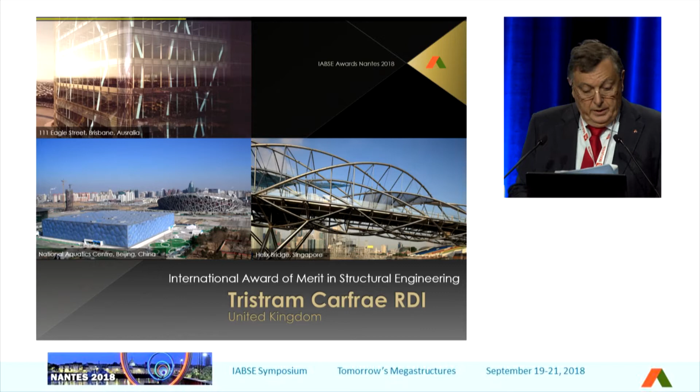Tristram Carfrae. May I please call him? It is my pleasure to present the International Award of Merit in Structural Engineering to Tristram Carfrae from UK in recognition of his outstanding contributions for more than 50 years to structural engineering, including several span world records and outstanding structures, and his sensitivity to bring structural engineering design close to art and poetry.

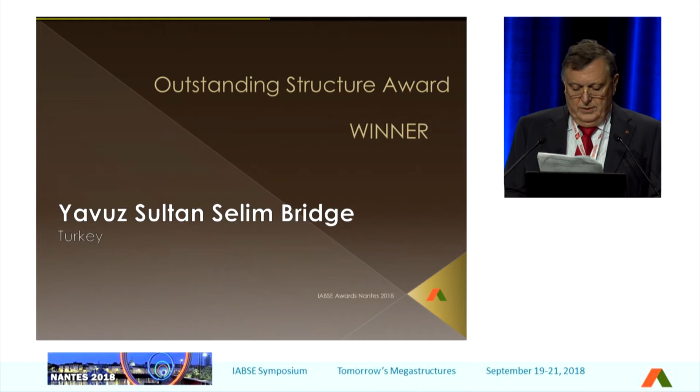This year, we have the Yavuz Sultan Selim Bridge, the third Bosphorus Bridge in Istanbul. It's considered the future of transportation and commerce for Turkey, linking Europe and Asia, by its major importance and its symbolic situation between the two continents. The bridge has become an iconic structure and a landmark of the Istanbul region and Turkey.

May I ask Naeem Hussain, please? He is the chair of the award commission. And the awardees, may I invite now Mr. Samet Sain, Mr. Thierry Delemont, Mr. Vincent Deville, Mr. Michel Virlogeux.

The laudation of this structure: the Yavuz Sultan Selim Bridge exemplifies an outstanding concept of combining the advantages of suspension and cable-stayed systems, as well as design and construction with the most advanced technologies in structural engineering. It epitomizes a holistic approach of engineering and architecture.

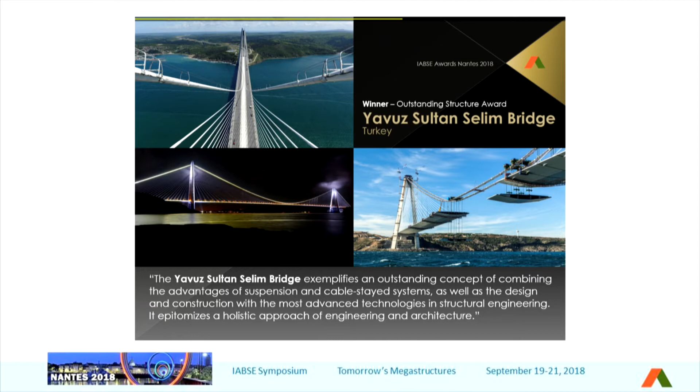Within this award, we also refer to the three finalists. The first one is the viaduct over the River Almonte in Cáceres, Spain. It's part of the high-speed railway between Madrid and Extremadura, crossing the River Almonte through a 996 meters long viaduct with a great 384 meter concrete arch, which makes it the largest HSR arch bridge built to date.

May I call Mr. Pablo Jimenez, Mr. Guillermo Capellan, Mr. David Arribas, and Mr. Pedro Cavero de Pablo.

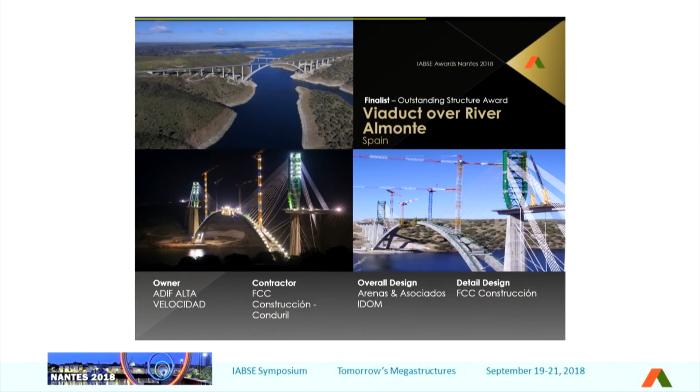The other two finalists are the Queensferry Bridge in UK and the Circle Bridge in Denmark. Unfortunately, we do not have the representatives here, so we shall just give congratulations to them, and we give the awards to the chair.

I'm taking this on behalf of the Queensferry Crossing people. I just happen to have a little bit of interest in it, and I will give it to the audience. Thank you.

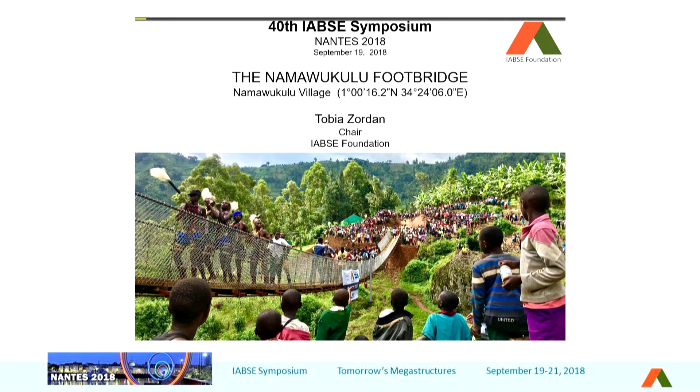Good morning, ladies and gentlemen. Thank you, Bruno. Thank you to the organizing committee and to IABSE for giving the foundation this space. I'm very pleased to be here today on behalf of the foundation and to have the chance to present to you our latest achievement.

It's a bridge. It's a bridge in Uganda. It has quite an interesting story, and I hope you will enjoy the story, and you'll be able to share more challenges in the future with us.

A few words about the foundation. The Foundation is a totally independent and non-profit institution which is run on a fully voluntary basis. We receive funds and we give out funds, so as much as we receive, as much we are able to provide. The goal is spreading the knowledge of civil engineering and promoting education programs and self-constructions in the most disadvantaged areas of Earth. The challenge last year was to build a footbridge in Uganda, a footbridge with a very high symbolic value and meaning.

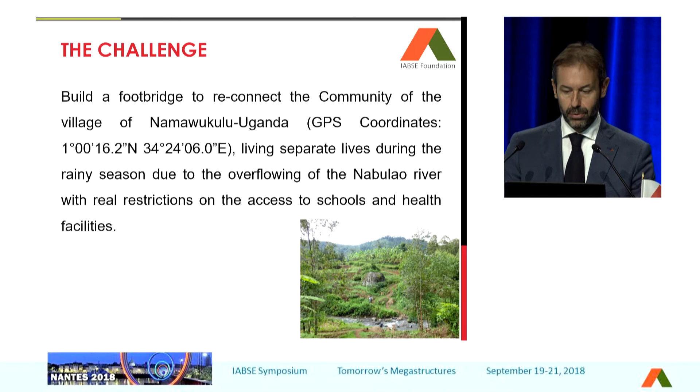A bridge can reunite two separate parts of a village which is cut by a river, flooded during many, many days of the year, more than 4 months. Of course, that creates problems for locals, and we will see what kind of problems in a while.

The partners of this venture: the project was proposed by Bridges to Prosperity, and we took the advantage. It was a very interesting project. IABSE is all about bridges, so we thought it was a fantastic occasion to have the chance to build a bridge.

So we took this challenge. We decided we wanted to be partner in this venture, and we shared the price with Ramboll, the other partner that paid for 50% of the cost. But we are IABSE - we want to be not just a financial partner. We are bridge engineers, we wanted to be a technical partner. And more than the money, we wanted to put effort, knowledge, strength, passion, and our sweat.

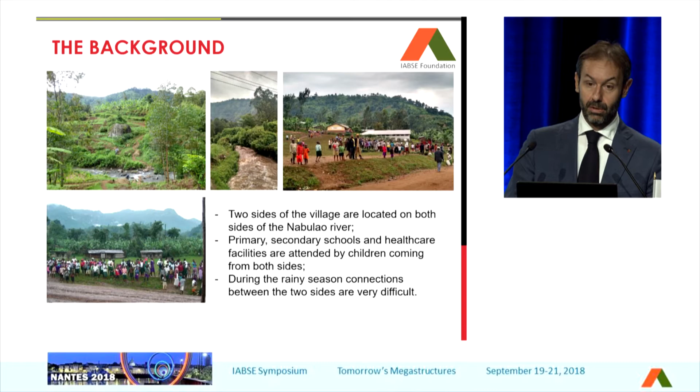The background - what we found was a village that was separated in 2 parts. A lot of children and locals were not allowed access to healthcare facilities and schools for a big part of the year, especially during the rainy seasons. You see here some short movies, a lot of enthusiastic boys, a lot of expectations to see what we could do, and if finally they could get a bridge that could improve the economy and the social relationship of the local community.

The project was provided by Bridges to Prosperity. This is quite a standard project. Of course, we are engineers, so the project has been double-checked, and we thought it was very simple, very cheap, but also a reliable one. And we decided we wanted to go for it.

The most important part, the team of volunteers. These guys are engineers, and they decided to go on site and put everything they had in order to get to the final results. Young people, a lot of energy, a lot of enthusiasm under the flag of IABSE.

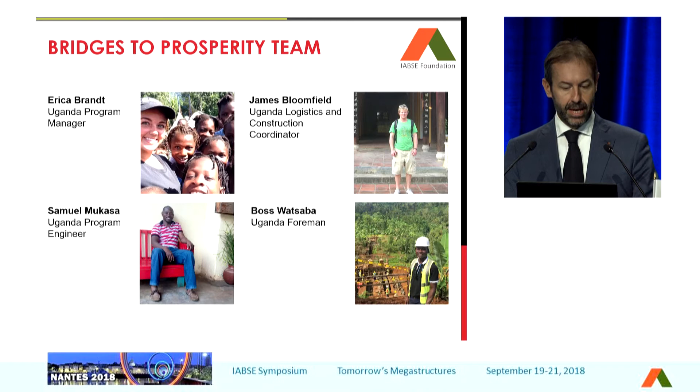Very good organization on site provided by Bridges to Prosperity. You can see here some of the people involved - the general manager, manager for logistics, and then a site engineer, a local site engineer, and a local foreman to check everything was going on there.

The local community played a fantastic and key role in the construction of the bridge. They showed very high motivation. They were trained before the beginning of the construction. They got a period of training, and on Saturdays, the worksite was fully open for the local community to come and enjoy, and of course contribute.

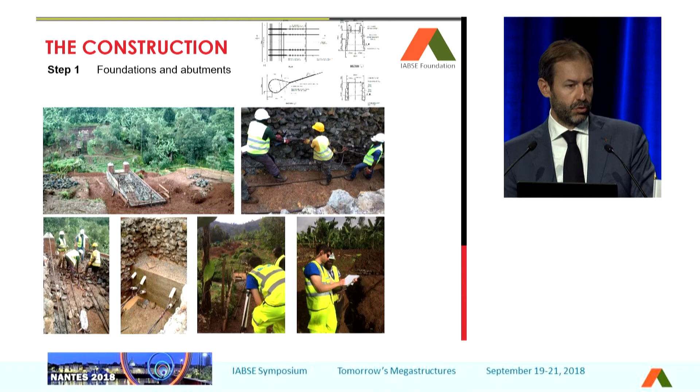Then the IABSE team arrived, and with the local team and Bridges to Prosperity and the Rumble team completed the foundations and the abutments. Really our engineers worked as carpenters to prepare all the details, to lay the cables, to bend the bars, to prepare the fences. And I have to say I'm very proud of it.

We started from the beginning, and roughly in 1 month, we got to the completion of the bridge. You see here some phases. I have to say that I'm very thankful to the team that worked on that.

And we finally got the opening of the bridge with the dynamic test of the structure. Very risky, actually, because we made some measurements about the frequencies, and we were very concerned when we saw people jumping, dancing on the bridge.

You see here this guy, Serjan. I think what better than having a few words from a person that put his effort and his sweat on site. So, Serjan, I think everybody is happy to see your face. IABSE is made of people, of volunteers, so maybe just a few words - you can explain your experience and what you got insight after this venture.

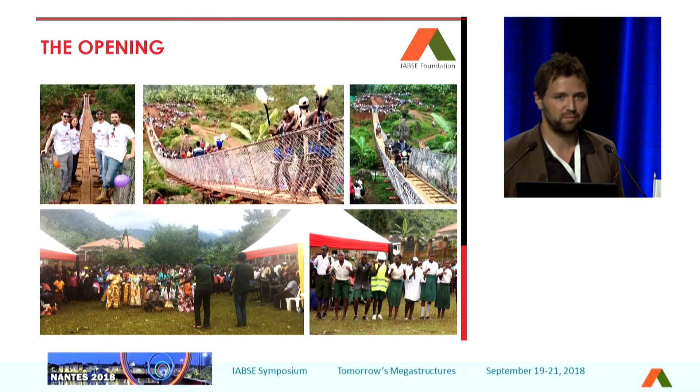Okay, Serjan, thank you for your words. I think they've been very important to all of us. You mentioned a very important thing. I hope you will continue doing this. Of course we will. We have plans for next year.

This is, I guess from my knowledge, the first bridge built under the IABSE flags. So this is our bridge, this is your bridge, this is the bridge of all the members of these associations and of all the volunteers. We want to continue this. We have plans for next year. We would like to meet you again in September with another achievement. But of course,

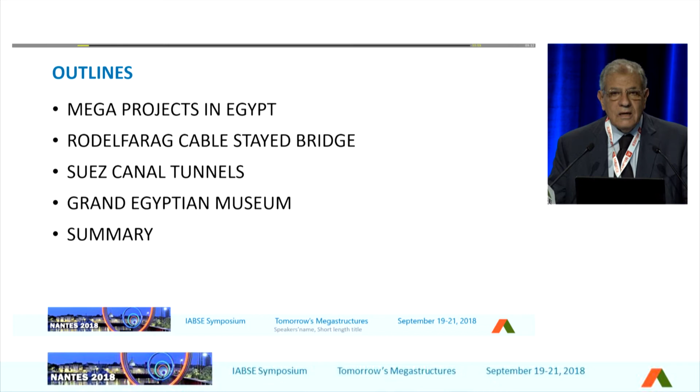Mega projects in Egypt - I am going to concentrate on highlighting three projects. One is a cable-stayed bridge, the other is two tunnels under the Suez Canal, and a landmark project - the Grand Egyptian Museum.

The revolution in January 2011 took its toll on the Egyptian economy, resulting in a slowdown that was reflected in deterioration of the real GDP growth rate and the increase of unemployment. Furthermore, total investment witnessed a material downward trend, and the country's foreign reserves were depleted significantly. This shows how unemployment increased after the revolution and the collapse of the Egyptian economy. Consequently, the rating agencies downgraded Egypt's sovereign rating by around 6 notches during the period from January 2011 to July 2013. You can see how also this downgrade occurred.

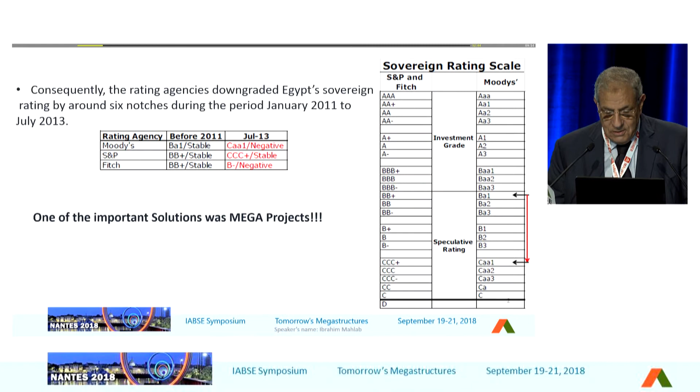We found that the only way to energize and activate our economy is going for mega projects. During the last 4 years, mega projects in Egypt have been diversified. We started with a very big project, the doubling of the Suez Canal. We dug a new canal parallel to the existing canal, with millions of cubic meters of dredging. During this period, we used 22 dredgers, and we achieved this project in 1 year.

The second one is electrical power station plants. We added 25,000 megawatts to our grid in 4 years, and I think this is the biggest project in the field of electrical generation. Affordable houses - 1 million units are planned to be added; we achieved 650,000 units till now. New roadways - 7,000 kilometers were added to our network in 4 years, and this also I think is a very remarkable project in Egypt.

Reclamation of the desert - we are adding 1 million acres to be reclaimed in the desert. New cities - 14 new cities spread all over Egypt, and a new administrative capital is now under construction. That means Egypt is now a very big site, working 24 hours, 7 days a week. Fisheries - we established a big fishery, 3,000 acres in the north of Egypt.

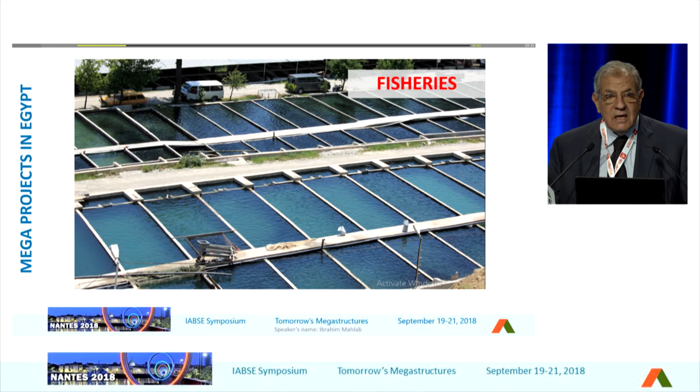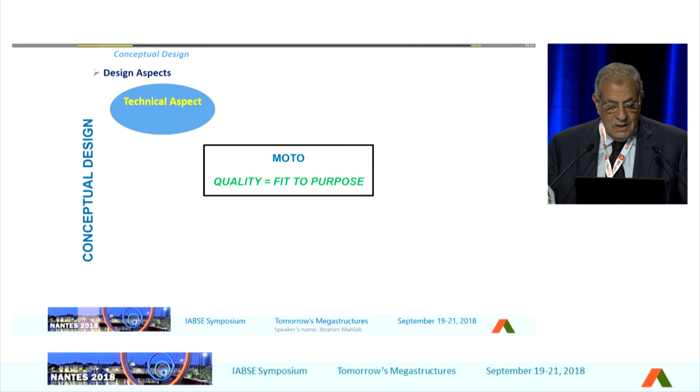Restoration of heritage and monuments - Egypt is full of heritage and monuments, and now we have started to restore them. Mega projects in Egypt: the Rod El Farag cable-stayed bridge is a remarkable bridge which we can really present, along with the two other tunnels under the Suez Canal, and the Grand Egyptian Museum. Our motto is quality equal to fit for purpose, and this was the concept of our thinking - technical aspects, economical aspects, formal aspect, and environmental.

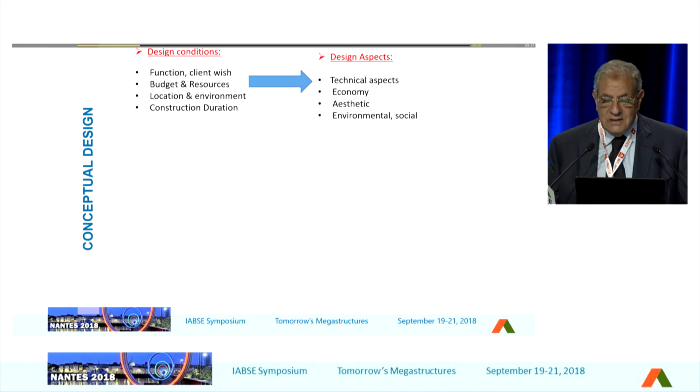Those are the 4 factors we worked with, because we don't have much time, and it is a question of how to select, during this process, the most optimized and most economical project, and to start immediate construction. Design conditions, functions, client wishes, budget, resources, location, and construction give us the design aspects. Design alternatives - we always have to think about value engineering and choose the most optimized project.

There was always a committee from the object design team, architect, client, contractor, project and management. This was a permanent team working to select the most economical project. It gave us the evaluation of alternatives and the decision making, and decisions were taken in a very short time. This was the big challenge.

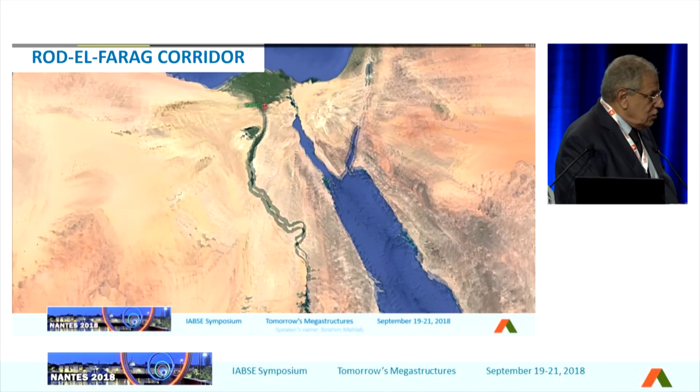Rod-El-Farag corridor is a corridor with 2 stages. First stage... now we have to go to Egypt. Okay, sorry.

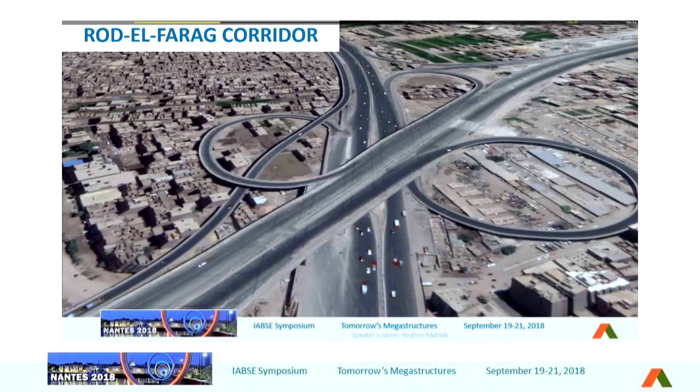This corridor is two stages. The first stage is 29 kilometers of roads linking the west and the east of Cairo. The first stage was an elevated road, 29 kilometers of roads elevated, with 9 small viaducts and 12 underpass and tunnels.

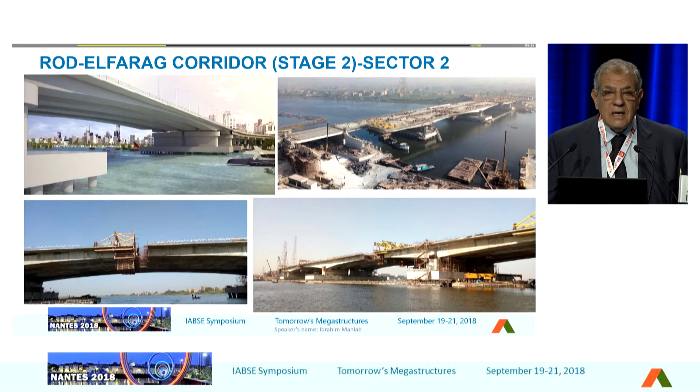This was sector 1. Sector 2 is 5 bridges. Stage 2 is 5 sectors. The first one is a bridge with precast beams. The second is a cantilever carriage pre-stressed bridge crossing the Nile. The third one is also a viaduct crossing an island. The fourth one is a viaduct crossing a very congested area in Egypt, Shubra.

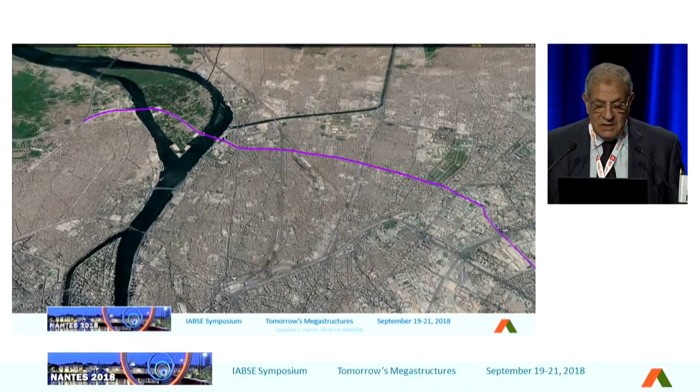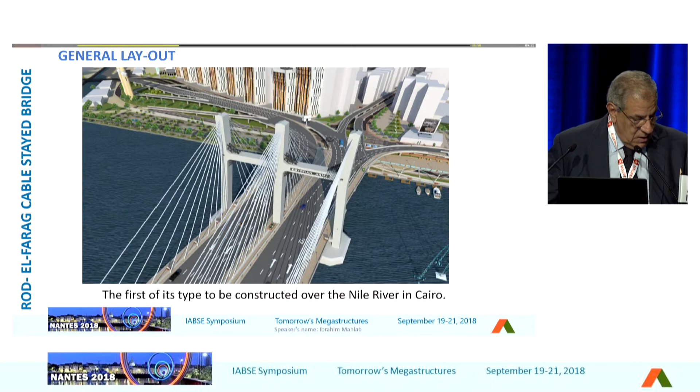The cable-stayed bridge is sector 4. This cable-stayed bridge is very special because it is the first cable-stayed bridge crossing the Nile. The bridge has a semi-floating bearing system in the longitudinal and transverse direction. The bridge floats in the longitudinal direction, where wind and seismic loads are carried by cables and towers, while it is supported transversely by bearings to carry transverse loads due to seismic and wind. The side spans have concrete box sections to work as a counterweight to the main spans under live loads, although this arrangement is unusual for such a side span to main span ratio of 0.4.

In construction, due to the bridge's heavy cross section, it was constructed using a rigid temporary formwork, specially designed and constructed for supporting those heavy loads. The bridge may be one of the widest bridges in the world, because the width varies from 64 up to 88 meters.

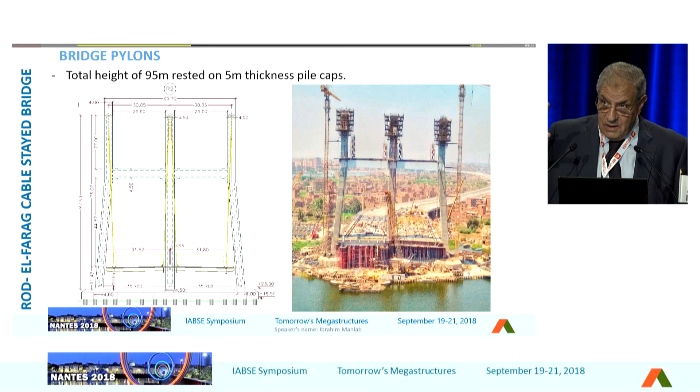This is the height of the bridge pylons. It was constructed by climbing form, with every segment 4.5 meters. The 95-meter height pylons have a hollow concrete cross section. The construction of pylons was carried out using self-climbing formwork. Each pylon leg was divided into 20 casting segments with a height of 4.5 meters each, with 6 platforms, considered among the heights of this construction type. The figures show respectively the pylon cross-section segment and the adopted self-climbing formwork.

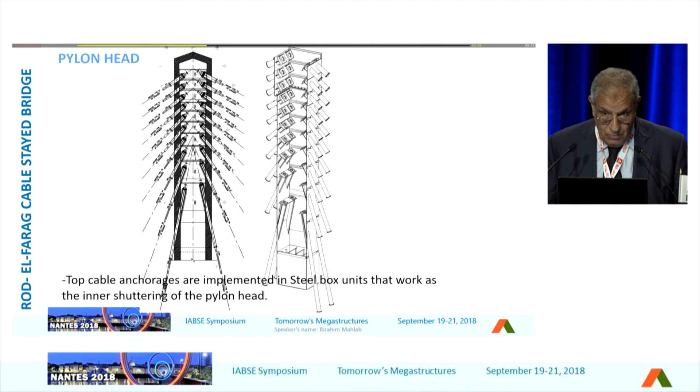This is the pylon head, a steel pylon head. The top cable anchorages are implemented in steel boxes that work as the inner shuttering of the pylon head. This was fabricated outside in a workshop, and because of the angle and accuracy required, the tolerance is almost zero.

This is the pre-assembly of units for geometry control. The pylon head erection: after assembling it in the pre-assembly workshop, we transfer it to the site and start the erection.

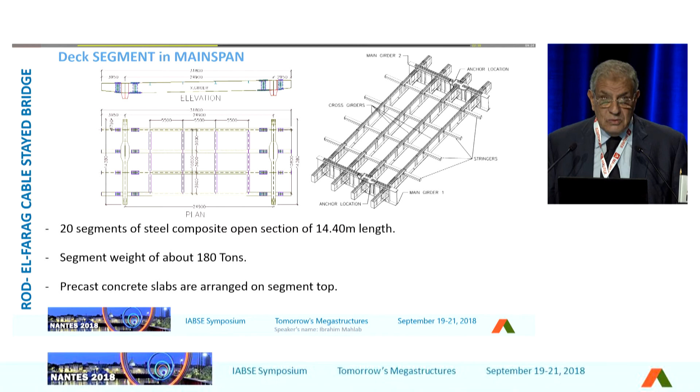The deck segments in the main span consist of 20 segments of steel composite open section, 14 meters in length. Each segment's height was about, and each segment weighed about 180 tons. Precast concrete slabs are arranged on top of the segment, also pre-assembled in the workshop, then transferred by barge and lifted to the site.

The steel deck anchorage. Deck anchorage fabrication considers sag angles, cables and the final geometry of the deck, with all welds fully tested using ultrasonic.

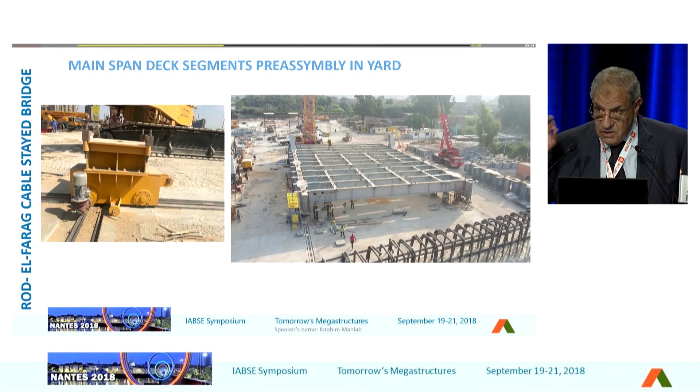The main span deck segment is pre-assembled in the yard. We assemble 3 segments, and all the holes are fitted at the workshop. This is how we assemble the deck segment in the yard.

The cross beams are then moved, and the next segment comes. This is the second segment - this is very accurate, how the holes fit, because when assembling on site it must be 100% accurate. And the third segment is coming.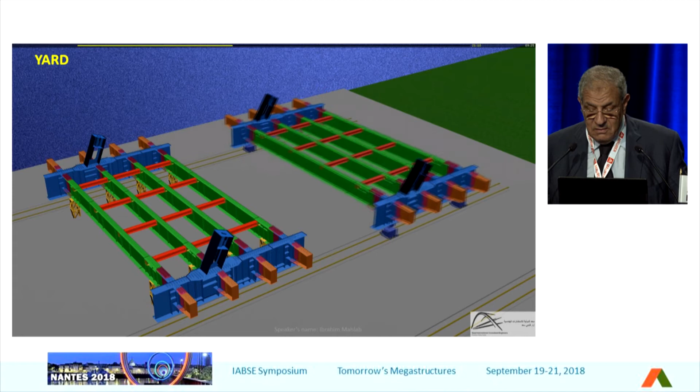Then we lift it by cranes, putting the segment on the barge and going to the site to be assembled. We used 2 launching girders for each segment, each with a capacity of 90 tons. This is the erection of the steel segment using the launching girder.

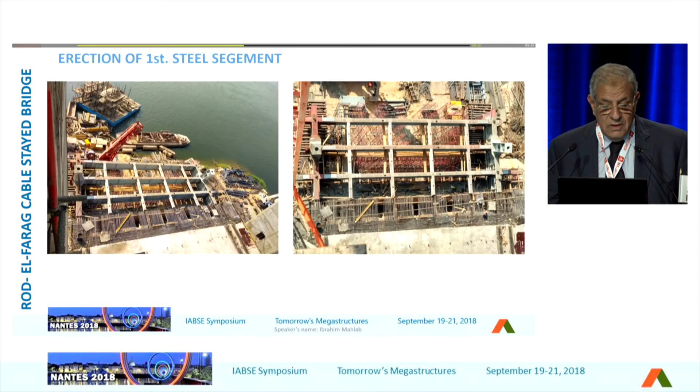Then we add the precast slabs, and stitch the slab together. The construction of the deck inside the span was an RC deck box section. The total width varies from 65 meters to 88 meters. This is the heavy shuttering and scaffolding for the deck span.

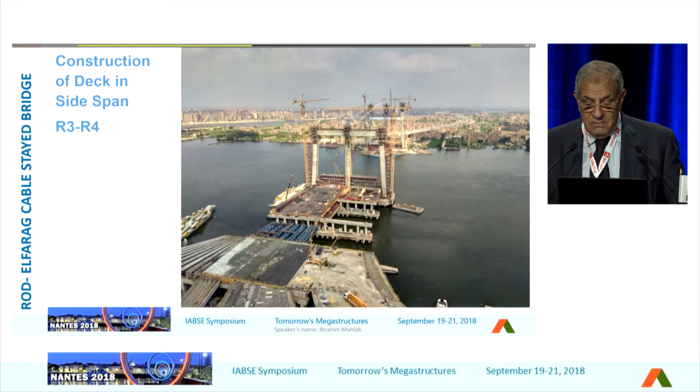This is concreting of the side span. This shows the construction of the pylon.

The main span was 300 meters, with 2 side spans of 120 meters each. This is a semi-floating bearing, floating in the longitudinal direction and fixed in the transverse direction.

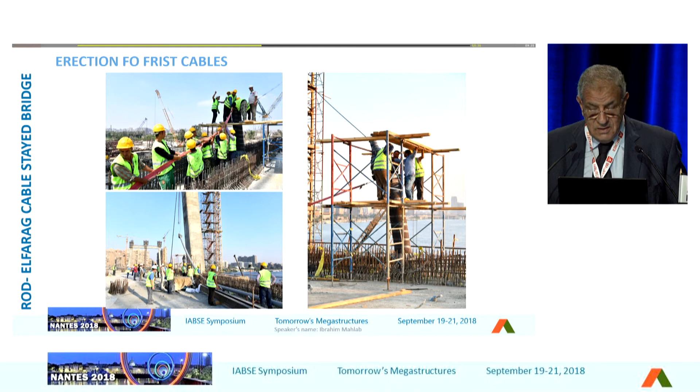This was the erection of the first cable, and now I think they are starting the erection of the second cable, now in Egypt.

Figures: total piling length, diameter 2 meter and 1.5 meter. We have used 8 kilometers of 2-meter diameter piling and 15 kilometers of 1.5-meter diameter piling. Total structural steel reached 10,000 tons. Total concrete volume 48,000 cubic meters. Total reinforced steel 19,000 tons. Total stay cables 1,800 tons.

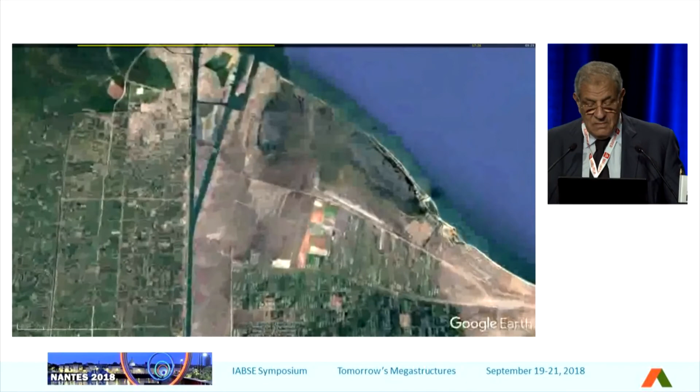This video is from the... okay, going to another mega project.

You know that in Egypt we have the Suez Canal between the west and east parts. The east part is Sinai, the west part is... and Sinai is in Asia. Always we have to cross the Suez Canal by bridges.

We constructed a cable-stayed bridge over the Suez Canal, but we need 4 tunnels, which we are constructing now, under the Suez Canal. The Suez Canal is very important, not only for Egypt but for the whole world, because the location of Egypt is in the center of the world, linking the Red Sea with the Mediterranean, and the Indian Ocean with the Atlantic Ocean. That means this is a very important location in the world.

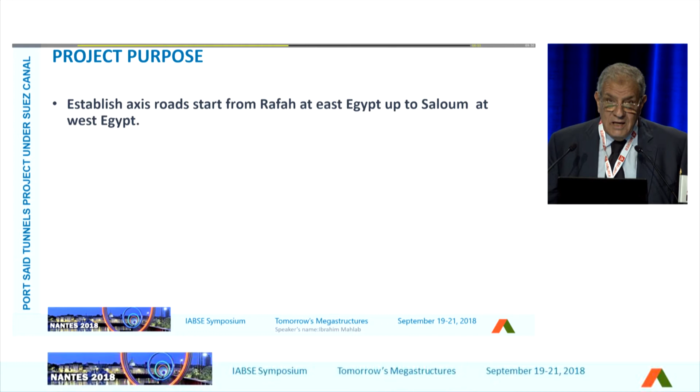We thought about those 4 tunnels, and at the same time we are creating an economical, logistic, industrial zone in Egypt east of the Suez Canal.

The project's purpose is to establish an axis road from the west of Egypt to the east of Egypt, direct, without crossing, without any obstacles, and to connect the international coast road with the west side of the Suez Canal to reduce distance by 100 kilometers compared to the current situation, and to serve East Port Said and the investment-free zone, providing new investment opportunities and accelerating urban development in Sinai, encouraging citizens from the East Delta to relocate, because Sinai represents almost 6% of the area of Egypt, but there is almost no one living there.

The population there is more or less 500,000, while Egypt's total population is 100 million. That's why we want to encourage people to go and live in Sinai.

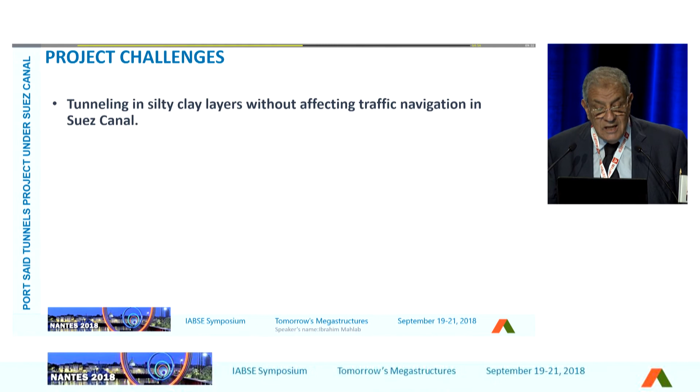Technical project challenge: tunneling through silty clay layers without affecting navigation in the Suez Canal. This is very important, that we are constructing the tunnel without affecting the traffic navigation.

The tunneling boring machine required modification due to dissolved methane gas. This area is full of methane gas layers. Transferring the material was another challenge, how to transfer the material from the west to the east.

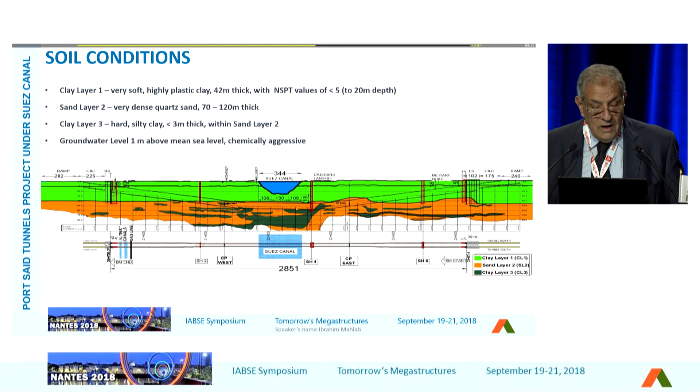Soil condition: this is the worst soil condition in Egypt. The clay layer is very, very soft, highly plastic clay, 42 meters thick, with standard penetration values of less than 5. The sand layer is very dense quartz sand, 70 to 120 meters thick, and below that a clay layer of hard silty clay, less than 3 meters thick, within sand layer 2. Groundwater level is above mean sea level, and this area is chemically very aggressive.

We started soil improvement, and we had to face the challenge of methane gas, because the risk was very dangerous - explosion or fire risk and gas flooding.

To mitigate the risk, a working group of all parties was established to review applicable codes and standards, investigate and define the gas hazard, and determine options and modifications for the tunneling boring machine.

This is the project: in the middle there is the North Tunnel and South Tunnel. Then we construct a launching shaft on the east side and a reception shaft on the west, plus a cut and cover area and an open security entrance.

In figures, for the Port Said road tunnels: the diaphragm wall is 510 meters on the west, 430 meters on the east, under the canal 0, overall 940 meters of diaphragm wall.

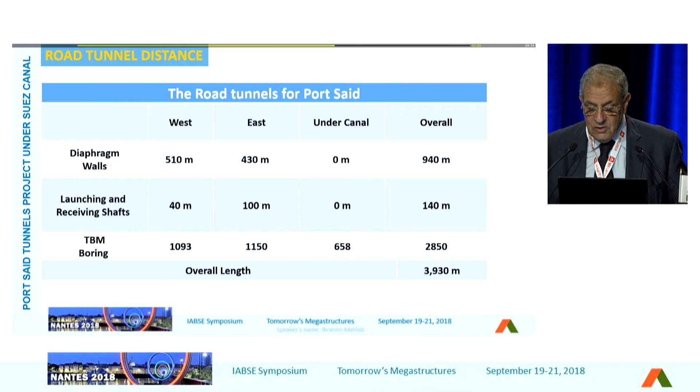The launching and receiving shafts: 40 meters on the west, 100 meters on the east, overall 140 meters. The tunnel itself, bored by the tunneling boring machine, is almost 1 kilometer 93 meters on the west, 1 kilometer 150 meters on the east, and 658 meters under the Suez Canal, for a total of 3.9 kilometers.

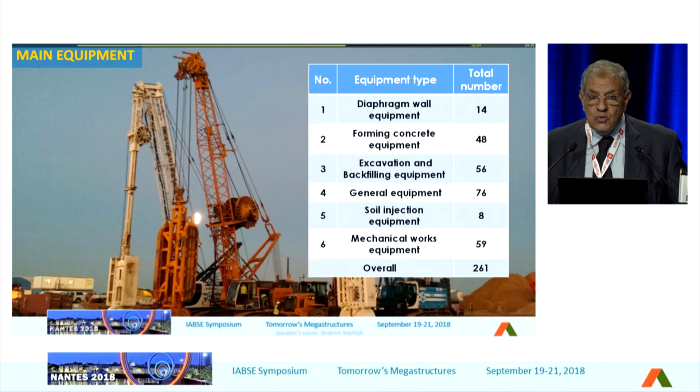We used 14 diaphragm wall equipment, forming concrete equipment 48, excavation and backfilling equipment 56, general equipment 76, soil injection equipment 8, mechanical works equipment 59, and overall there was 261 equipment on the site.

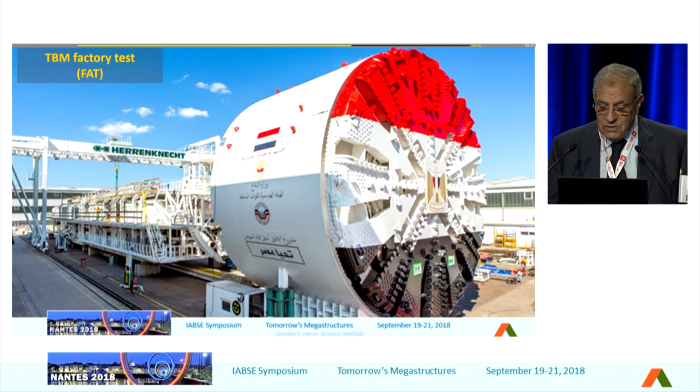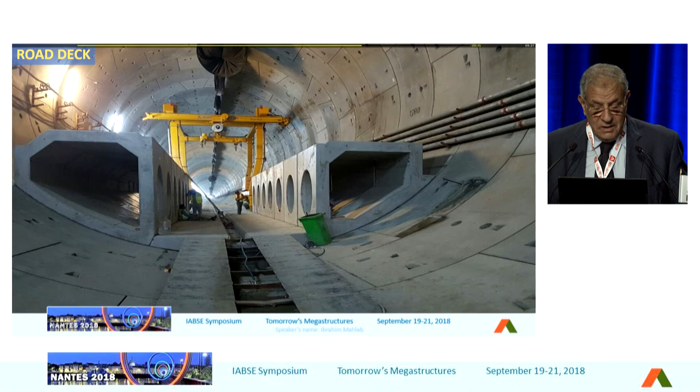This is the road deck. It was precast, and now we are fixing the road deck in the tunnel. This is planned to be open mid of next year.

This is the cut and cover and diaphragm and the struts. This is the cut and cover area.

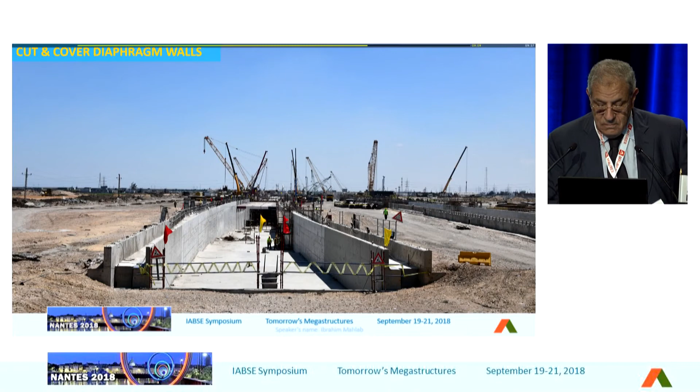From these figures you can imagine the challenge, because we started at the beginning of 2016, and now the tunnel is almost structurally finished.

Last but not least is the Grand Museum.

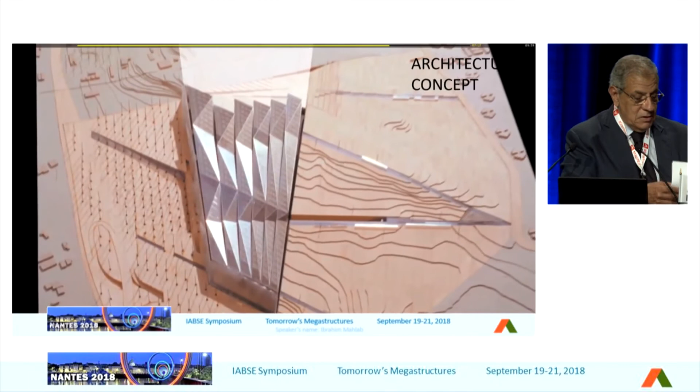This is the Grand Museum on the plateau of the pyramid. It's 2 kilometers from the pyramid. The architecture design came from a competition, and this design won the first prize.

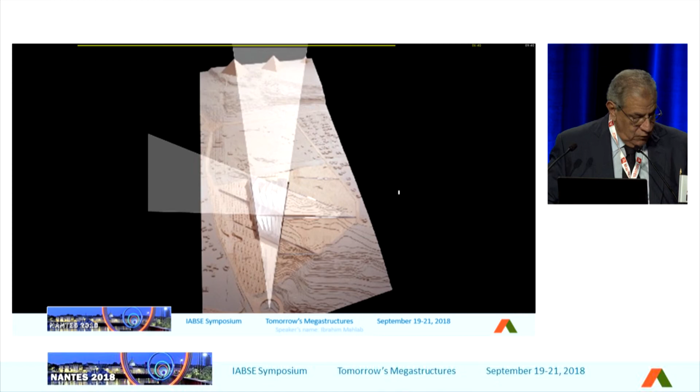The architect's design of the museum was based on the concept of pyramid formation in both elevation and plan views. The main building footprint was planned based on the pyramid's plan grid lines. This shows the relation between the structure and the monument, the pyramid.

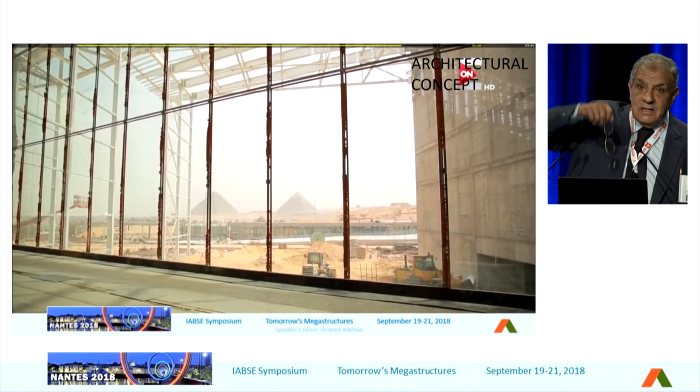The sight lines regarding the three pyramids, starting from an exact point at north and west, intersect with each other forming the building footprint. This is the idea of how the projection in elevation and plan intersect to create the location of the museum.

There is an entrance courtyard containing a long span opening with a mesh roof, primarily for shading. The entrance is located at the heart of the master plan.

The truss cross sections are made of box steel section with dimensions ranging from 40 centimeters to 80 centimeters, and thickness up to 9 centimeters.

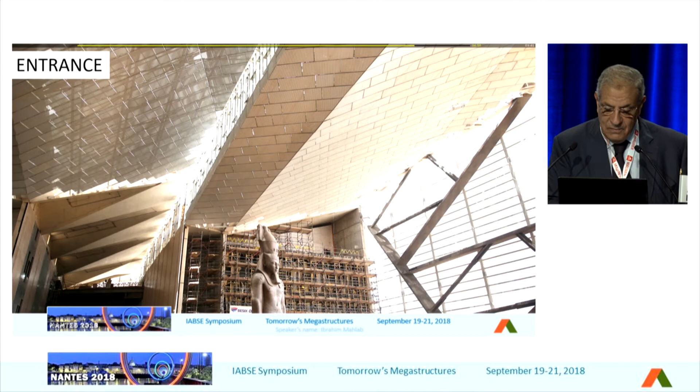In the entrance, we put the statue of Ramses, and there is a history for the statue - it was relocated from a very congested area to the museum.

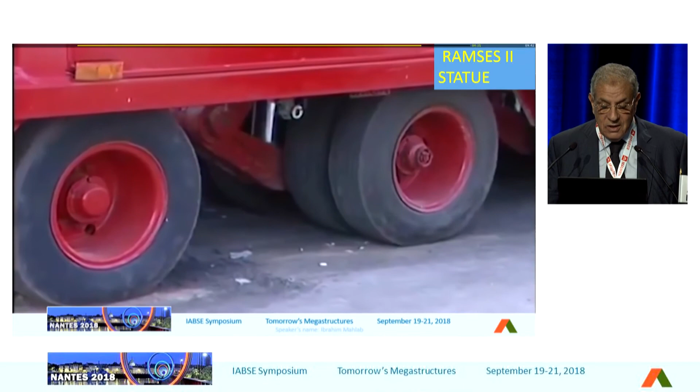This is another project, but it will take a long time to describe. The relocation and transportation of the statue was covered by more than 70 international television stations. This was the original place, in a congested area near the railway, but the pollution and congestion forced us to relocate it.

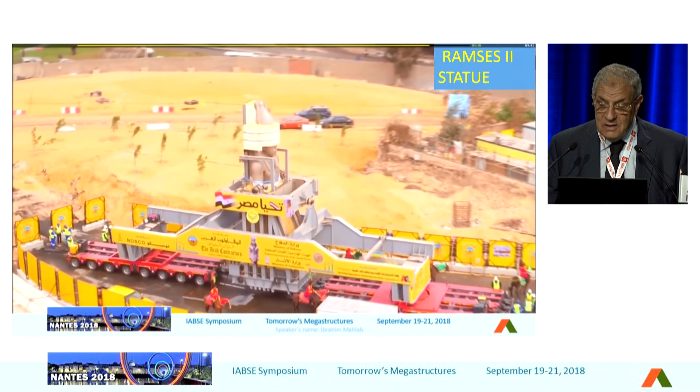We transferred this statue in the year 2006 to the site of the museum. It took more than 1 year for the safe transportation of this statue. Later, we moved it from the storage in the museum to its final place.

In the entrance, we considered him as a king, and there was a small parade and festival to receive King Ramses in his final place. This is the main place in the museum.

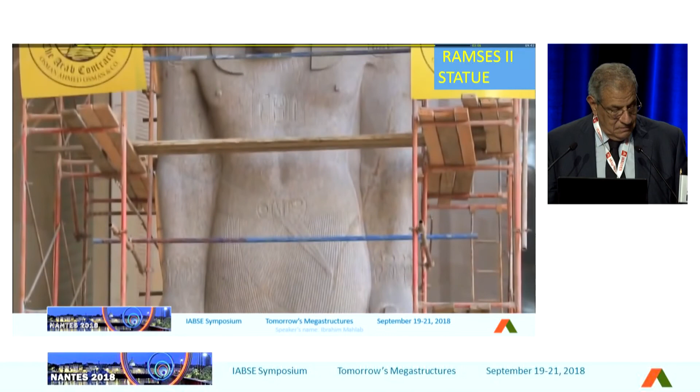This museum is planned as a museum of the art and craft of ancient Egypt, described as the largest archaeological museum in the world. The museum is under construction and scheduled for completion.

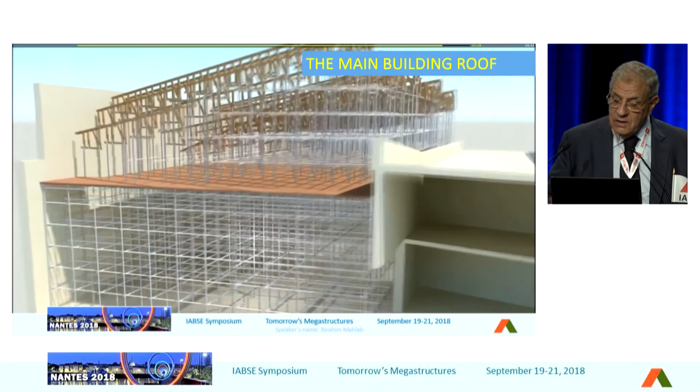The full structure is finished. Now we are in the finishing, landscaping and electromechanical works phase. This is the main building roof, which I described, the steel trusses.

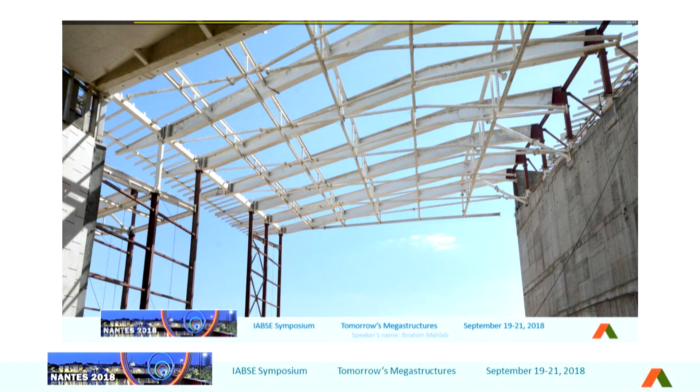This is the main building roof and gallery roof. Over the museum and conference center, a steel folded plate roof together with external shaded void and internal ceiling void fill the roof volume, as shown in the photos.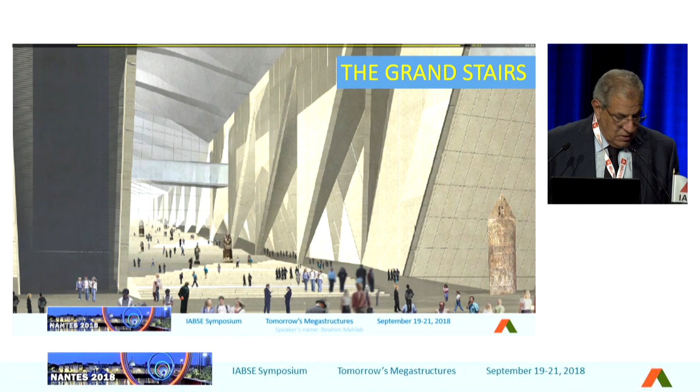The main building structure system consists of a steel beam grid with I-beam cross-section. The main beams are supported by the main trusses of the roof, while the secondary beams rest on the main beams. This is the grand stairs.

The grand stairs wall consists of two sets, and people sit on the steps, and from the steps they can look at the pyramid.

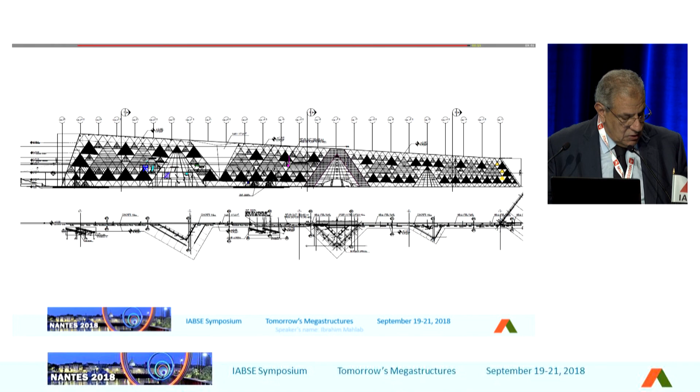This is the facade. The structure system of the pyramid's wall is comprised of a vertical steel grid of box steel sections aligned in the diagonal direction and supported on a reinforced concrete wall, as shown in this figure. At the entrance opening, mega steel panels are used to support the facade cladding.

During construction, the fixation of steel diagrid in the concrete wall was followed by mounting the stone panels.

Those are transparent stones. In the sun, they will be transparent. At night, they will be lighted between the steel trusses and the facade.

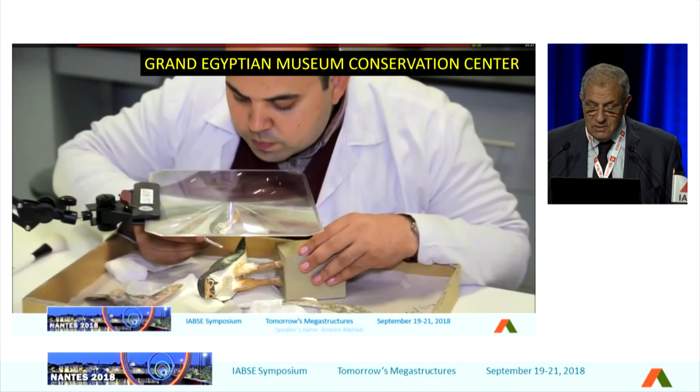At the same time, we have a big workshop in the museum for conservation, and there is a conservation center where all the monuments that are going to be exhibited in the project are conserved.

There was a very strict environmental strategy in this project.

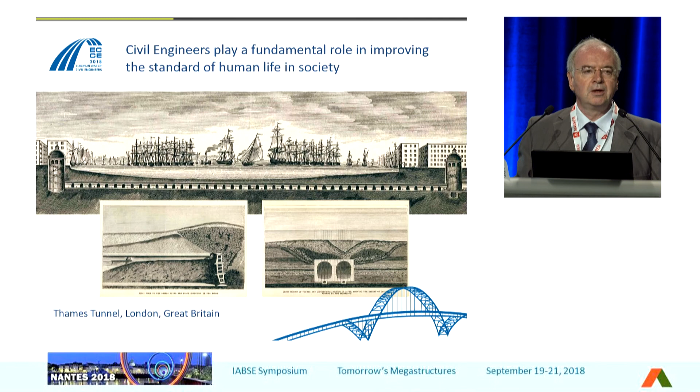During this year, ECCE wants to reinforce the fundamental role of civil engineers in society in improving the standard of human life from the old year until now.

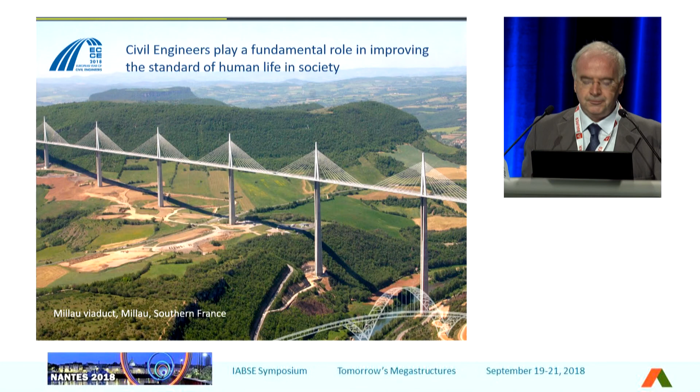We accomplished this through many different types of projects, including dams and reservoirs, water distribution and treatment facilities, road networks and bridges, foot bridges, rail networks, energy generation and distribution facilities, but also stadiums, and cultural and social facilities, and many others like airports.

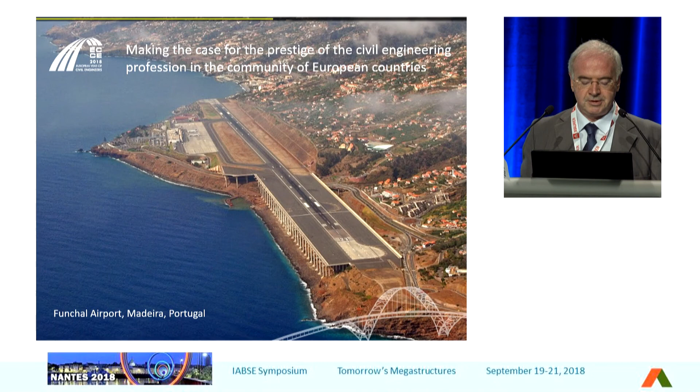Finally, ECCE wants to stress the pivotal role that civil engineers will play in addressing the challenges that will face society in the future, including rapid urbanization, climate change, and the digital revolution. I hope this has given you a useful introduction to this year, EYCE, the European Year of Civil Engineers.

So it's time now to move to some main features of the organization of our symposium.